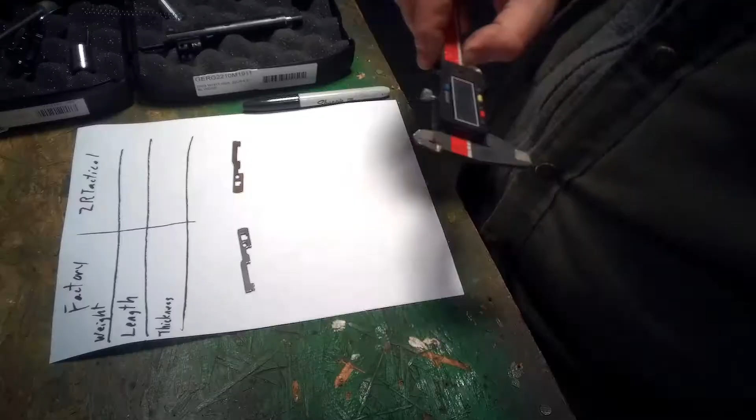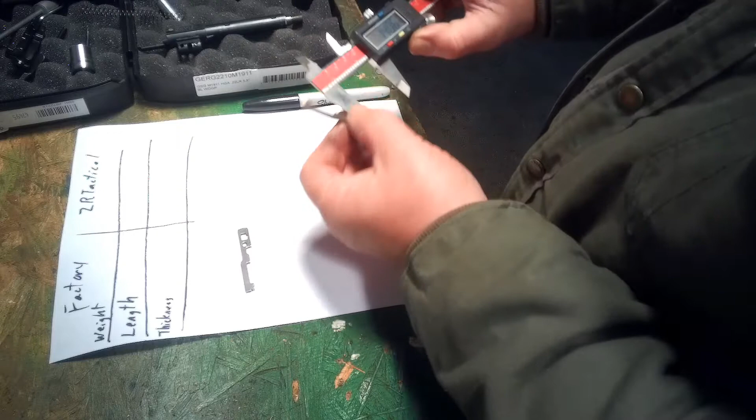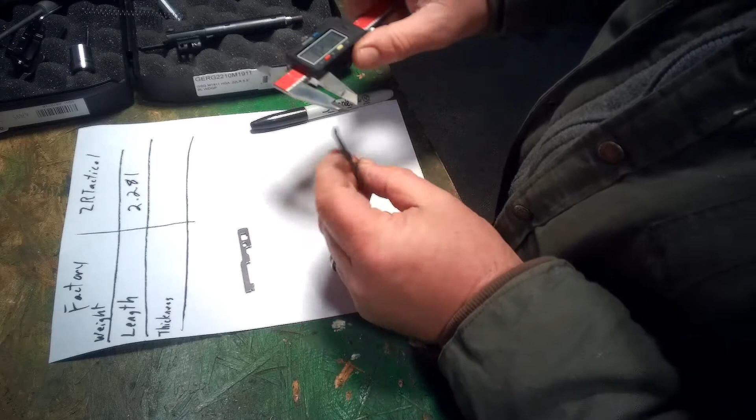Alright, ZR Tactical Solutions, we're going to do that one first. Don't know if you can see this. The striking surface comes all the way out to the tip. And I don't know if you can see that, but that's 2.281. That's how long it is. Thickness, we'll zero out again. That's right at 81 thousandths thick.

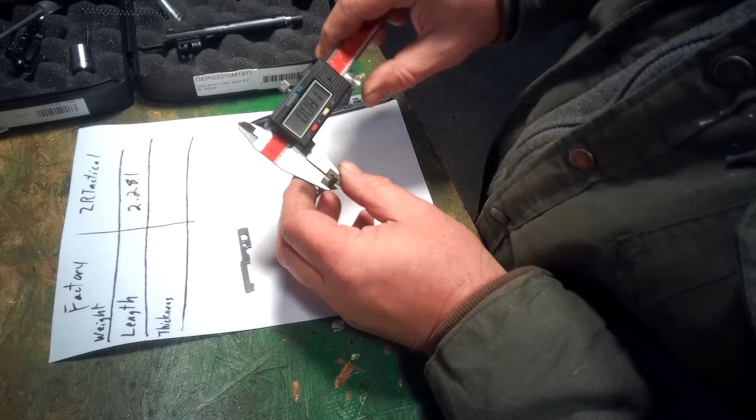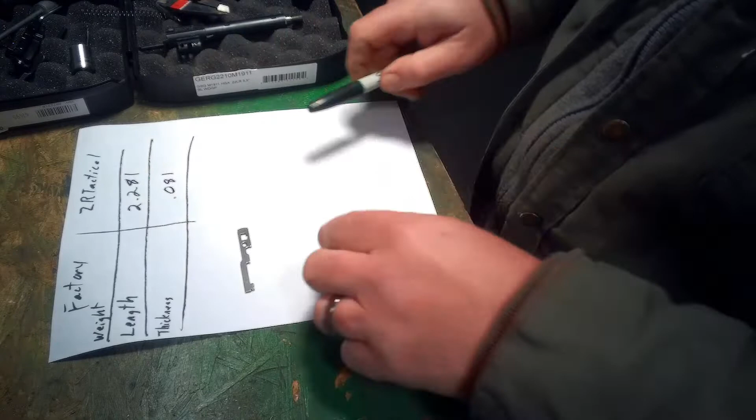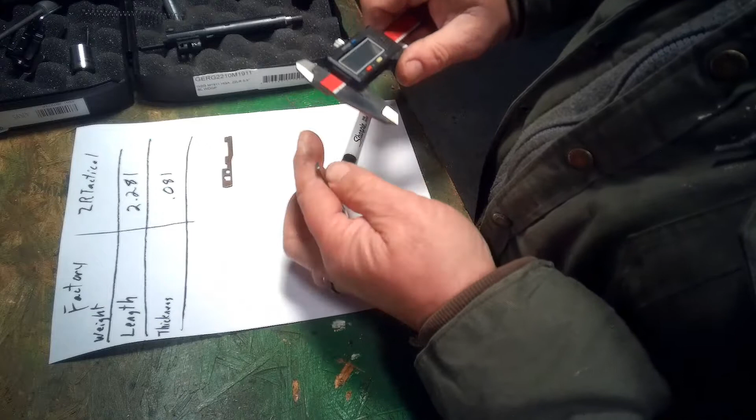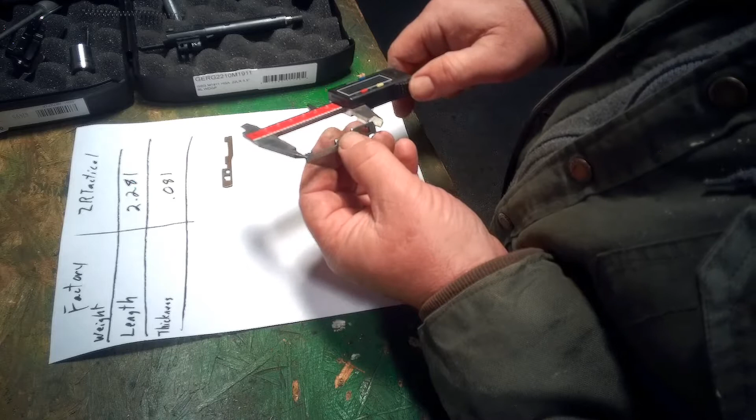Now let's do the factory. And as you can see on the factory, the striking surface, the actual primer contact surface, is set just a little bit further back. The idea of this was to have a longer firing pin. 2.221.

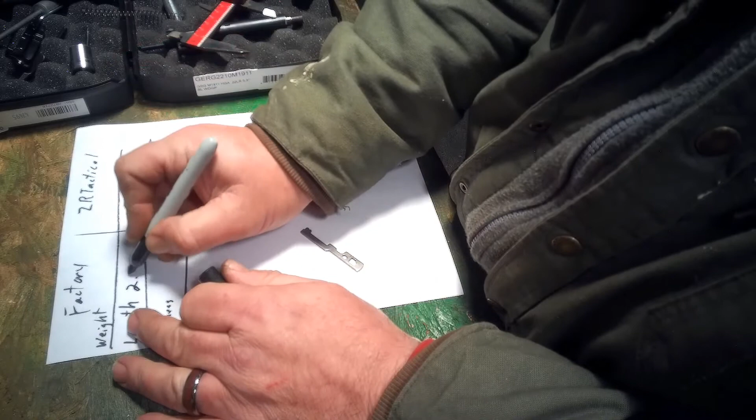And we are... my hands are cold. It's cold and nasty here.

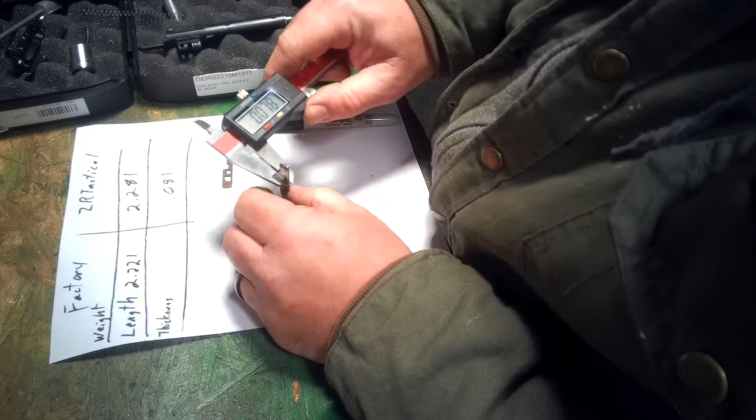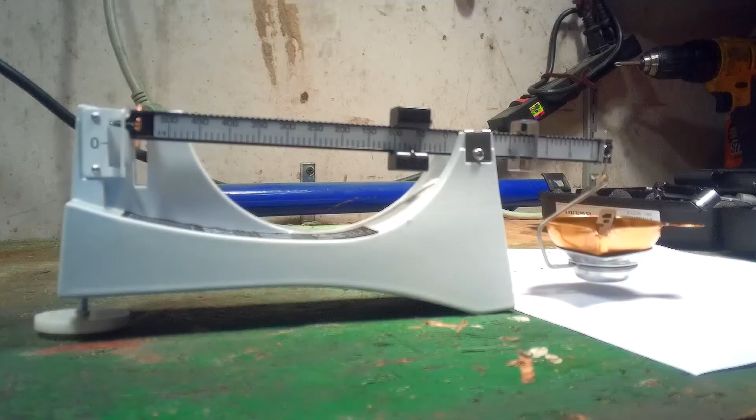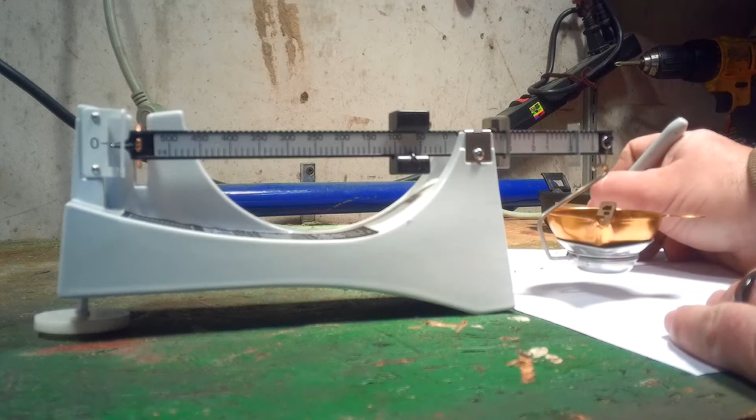We're looking at 78 thousandths thick. Alrighty. Now the high performance ZR Tactical pin, get a weight on it. That's about 76.4 grains. That's on the ZR Tactical. Let's get the factory.